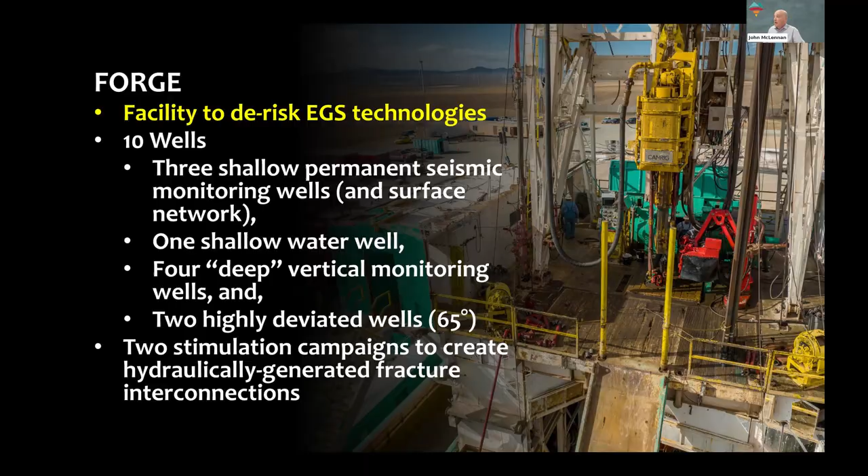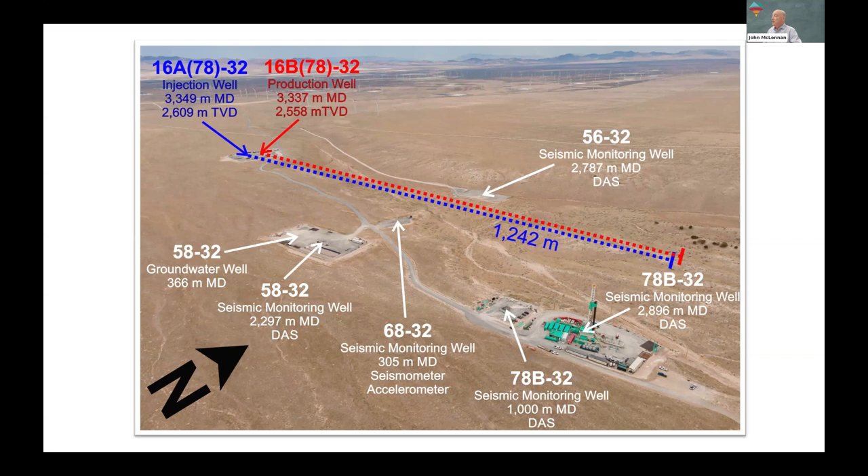To get a perspective of this, the white arrows indicate the groundwater and monitoring wells, and the blue line indicates an injection well that was drilled at 65 degrees in the direction of the minimum principal stress, fracked in 10 stages over a couple of years. Above that, 300 feet immediately above, is the well whose horizontal projection to the surface is shown with the red dots. That well, known as 16B, is the production well, and it has also been fractured.

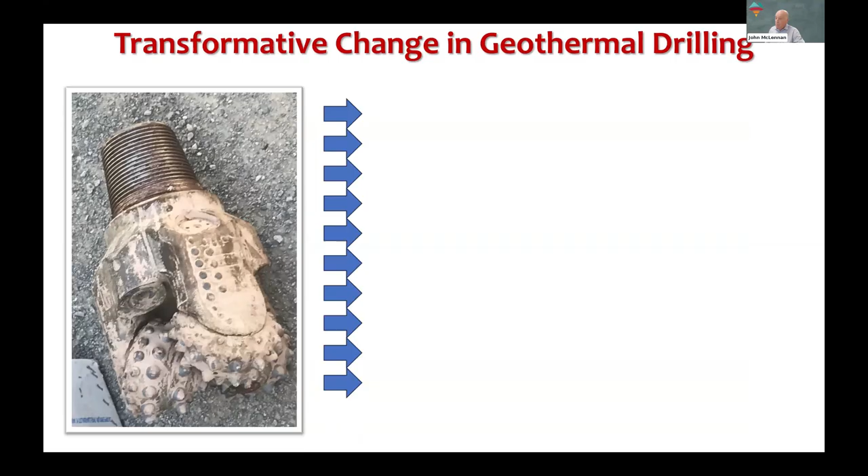Looking back at some of the highlights of Forge, one thing that has turned out particularly well is being a participant in a transformative change in geothermal drilling, moving from roller cone bits, shown here, to polycrystalline diamond compact bits, where we've had tremendous success. That's illustrated in this particular drawing.

The y-axis is the measured depth, the x-axis is the on-bottom hours, that's how much time you're actually drilling. You can see that the first well we drilled was 58-32, drilled with roller cone bits. To go to 7,500 feet with roller cone bits, we were proceeding at maybe 5 to 10 feet per hour, and it took almost 600 hours to get to 7,500 feet.

When we drilled our first inclined well, we drilled that well exclusively with polycrystalline diamond compact bits, PDC bits, and to drill to a greater depth took about half the time. Progressively this has improved with time, as you can see for the wells, and ultimately the 16B is our production well.

Now, I have to say that Fervo, as you'll hear, has taken this even further, where they've really refined the drilling process. This makes a huge difference in the CapEx of geothermal operations.

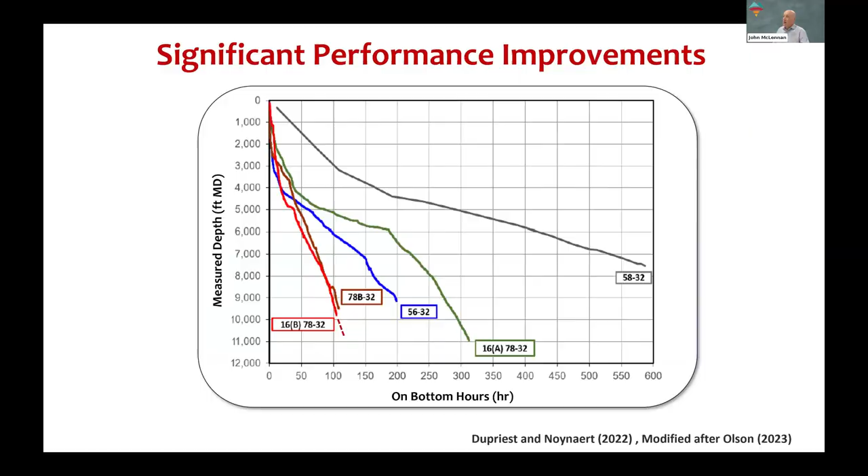So to recap drilling, I think Forge has demonstrated the viability of PDC bits. One of the things that was successful at Forge, in addition to that, was the interactive near real-time bit redesign facilitated by a superb degree of cooperation with bit manufacturers. Certainly in the first well that was with NOV, ReedHycalog. We've subsequently had very good relationships in our drilling with the other drilling bit companies.

So what we've seen is dramatic increases in ROP, and also substantial increases in time on bottom are recorded. As I said, you'll hear more about this, I'm sure, from subsequent speakers.

We've also embodied the philosophy that Forge is a facility for testing third-party products, and we've tried out rotary steerable technologies, we've tried out particle drilling, and we were lucky enough to try out Eavor's insulated drill pipe, which was very successful. However, these are some of the successes.

There are some things that we need to think about, particularly as we move away from sort of an almost ideal drilling environment at Forge. In many other parts of the world, geothermal drillers encounter significant interfacial severity, and there tends to be a correlation between bit DBR, complete bit failure, with interfacial severity, which is usually associated with natural fractures where there's a substantial contrast in mechanical properties going into the fracture and out of the fracture and subsequent bit failures.

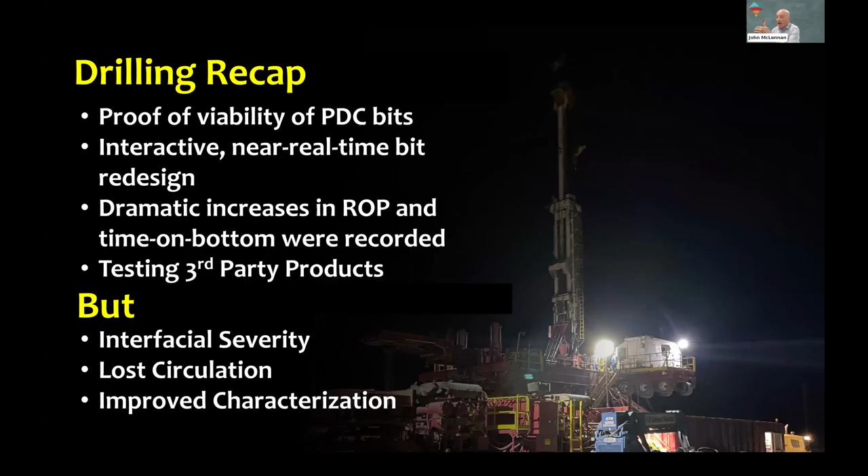Lost circulation in places outside of Forge remains a significant problem in EGS if you're drilling ahead. These two also interrelate to the ability to have improved characterization in advance of your drilling and understanding how that affects your drilling operations. So drilling has some lessons learned and some lessons to be learned.

The stages in the production well were guided by frac hits that were monitored by fiber optics that had been successfully cemented in the production well.

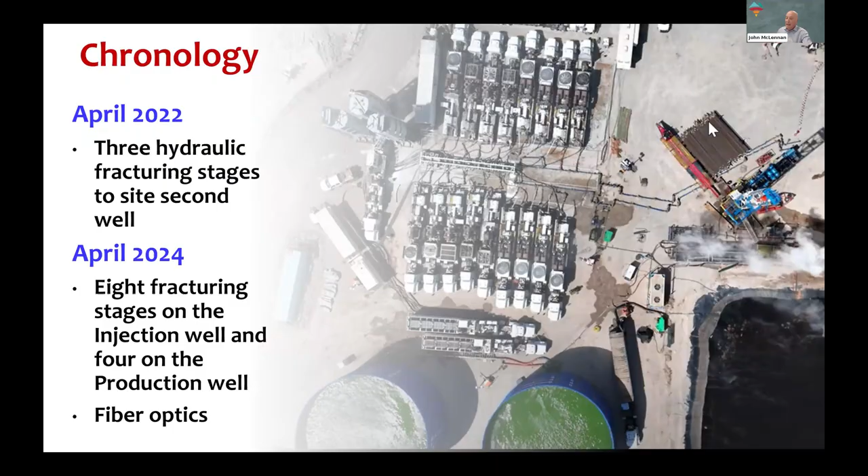So if we want to recap the hydraulic stimulation, here are some of the things we found. First of all, it was a demonstration of successful hydraulic fracturing in a granitic setting. You can see some microseismicity from our first fracking campaign where three stimulations were done at the toe of the injection well.

In my mind, we have a clear demonstration of the requirement for proppant in these fractures. Production logging testing after the fact has shown that fracture stages that were not propped did not take fluid. And so this really reinforces the need for proppant.

However, what are the buts here? Well, first of all, there's still a lot to be learned about the mechanics of completion. How many clusters are important? What sort of cluster spacing? How can we keep fractures independent and maximize the growth?

The second thing, the obvious one, is proppant durability. In these environments, certainly silica sand ultimately is probably not going to work out, and using alternative proppants is going to increase the initial costs, but it'll be of value in the long run.

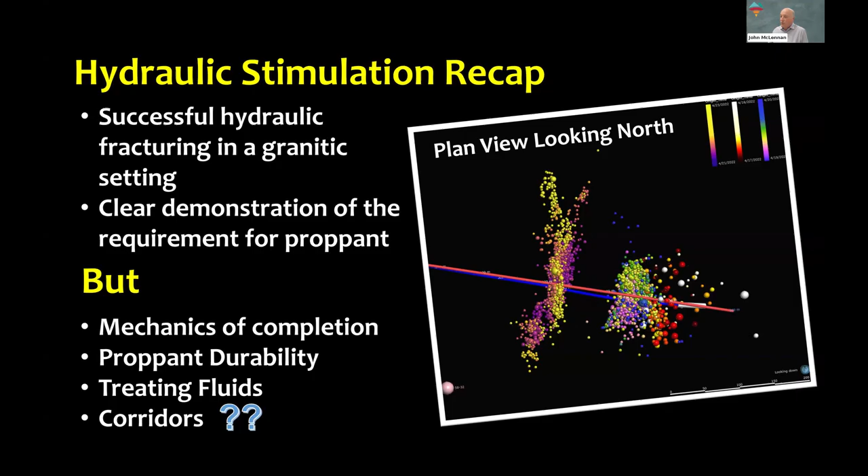And then finally, one of the things that was really very interesting was that there were fracturing corridors. So what do I mean by fracturing corridors? Well, let's look at this plot. Let's look at the east-west extent of the two wells on the x-axis and the vertical depth on the y-axis.

The bottom red line represents the injection well. The top blue line represents the production well. Each one of those dots is either a set of clusters or an individual frac stage. And what you can see from these frac stages, particularly looking at stage 8, is that these stages are not uniform, they're not regular, and that there are interactions of flow.

If I look to the right, I can see that the first 3 frac stages all converged on the same set of frac hits, determined by fiber optics on the production well. So that's one corridor. Then if I look at stages 8, 9, and 10 to the left, uphole, we can see that the end of stage 8, stage 9, and stage 10 all flow out of the same exit.

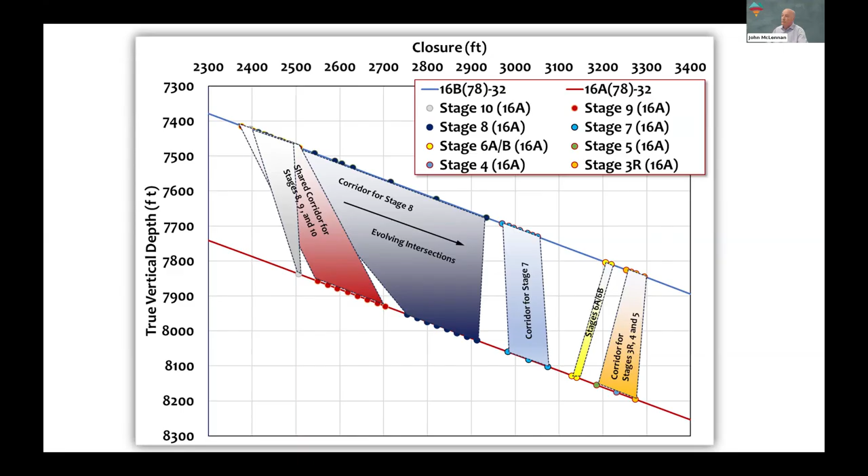So really, there's heterogeneity, there's natural fractures, possibly some minor faults that are playing a role and need to be considered. And so once again, this goes back to the whole concept of reservoir characterization. So how do you test all of this out?

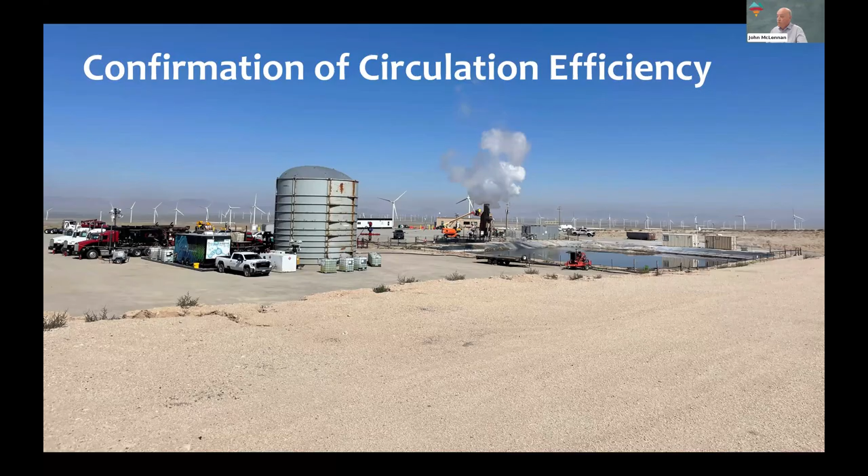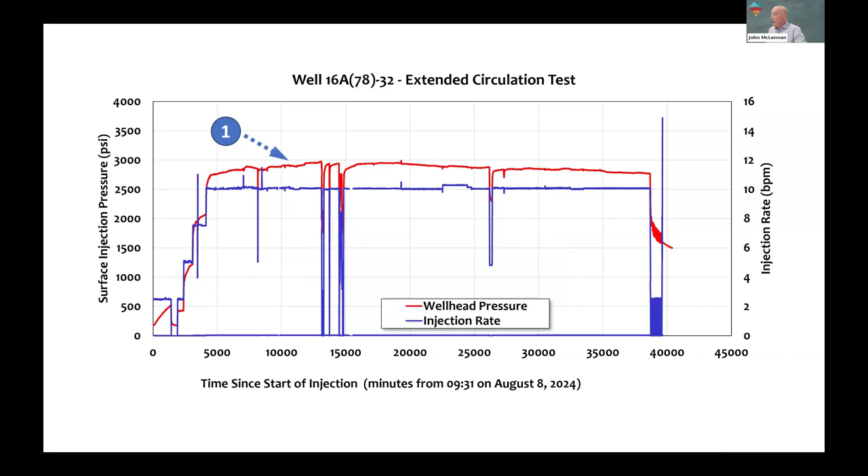We've carried out some short-term and intermediate-term circulation tests, pumping down the injection well, producing through the fracture system, and producing out of the production well. Here is an example from a 28-day circulation test, where the red curve is the surface injection pressure, and the blue curve shows that we maintained a constant rate of 10 barrels per minute over a relatively large period of time. I've got some numbers on here, and I want you to remember what those numbers are pointing to. That number is pointing to a pressure that's about 2,900, almost 3,000 PSI to circulate 10 barrels a minute.

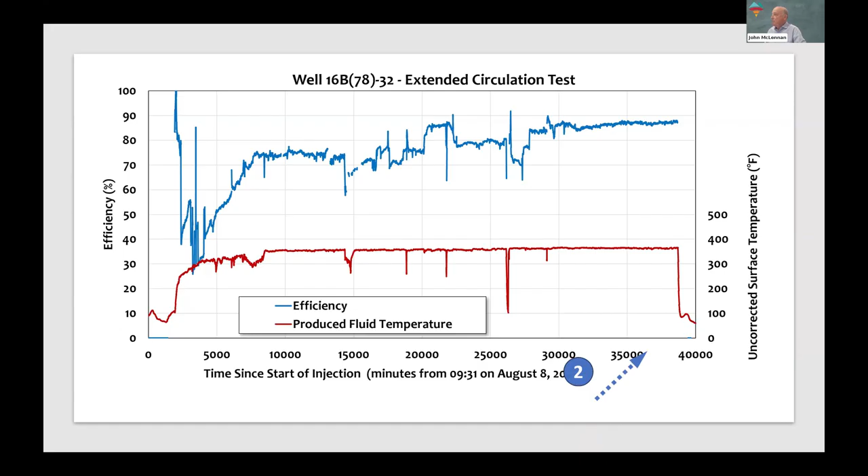And then the efficiency is shown in blue, and that's the ratio of the mass flow rate out divided by the mass flow rate in. And it was approaching 90%. So let's remember that too when we come back for a recap.

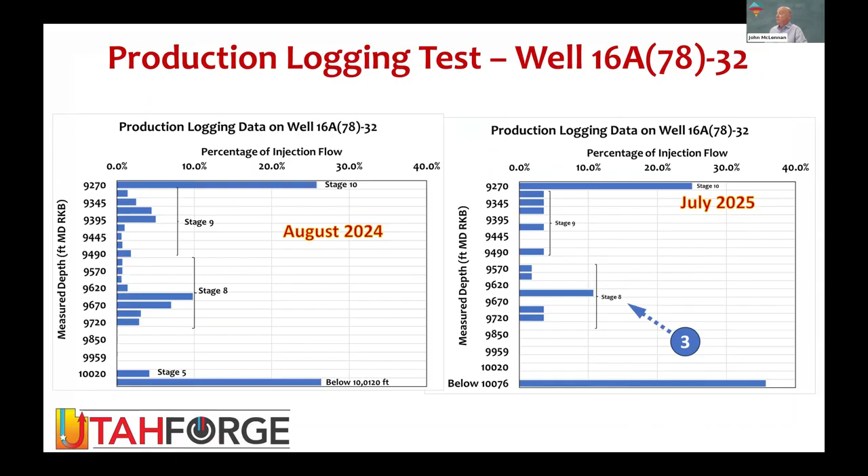We have run production logging tests at various times, and we have seen that there's some degree of uniformity, but not all clusters are taking fluid. And so there's still room for optimizing the clusters in the fracturing treatment. That's the third thing to remember as we come up to this slide here.

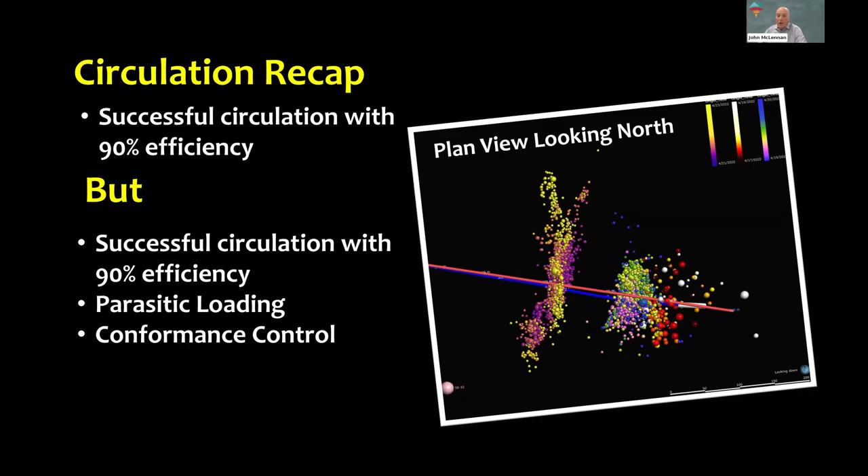90% seems pretty good. However, if you think about where that 10% of fluid is going—and I'm circulating up to 60,000 barrels a day in a production injection well combination—that's a substantial amount of fluid lost. It's anticipated this will decrease over time as you build a network of wells, but replacing that water will be expensive and could have other consequences. That was my number 2 point: 90% efficiency isn't good enough.

The next thing is parasitic loading. We treated these wells at about 2,900 PSI. If one calculates the hydraulic energy required to pump 10 barrels a minute at 3,000 PSI, it's not insignificant, and that parasitic loading subtracts from your net power. This is certainly a solvable problem—it relates to either near wellbore restrictions or inadequate conductivity of the fractures—and it's something that needs to be resolved in the future.

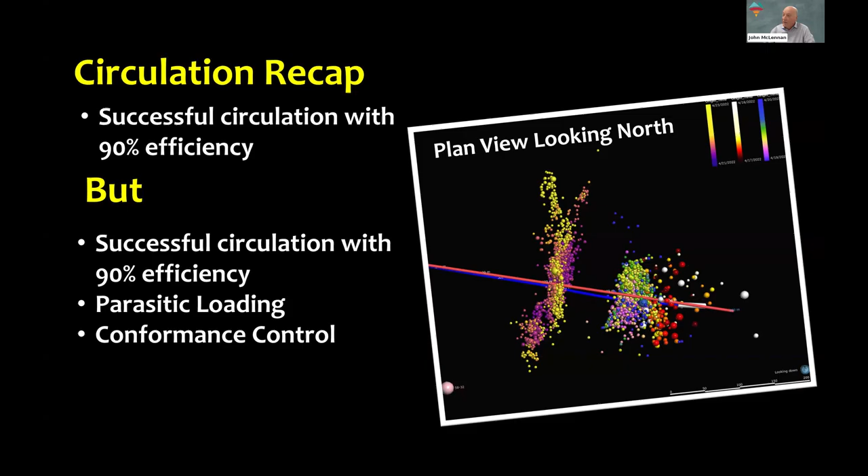The third point is conformance control, where you're looking to get equality of flow through all of your perforations. This is something the industry will have to work on, to understand how to achieve conformance and how to mitigate issues if you don't have it.

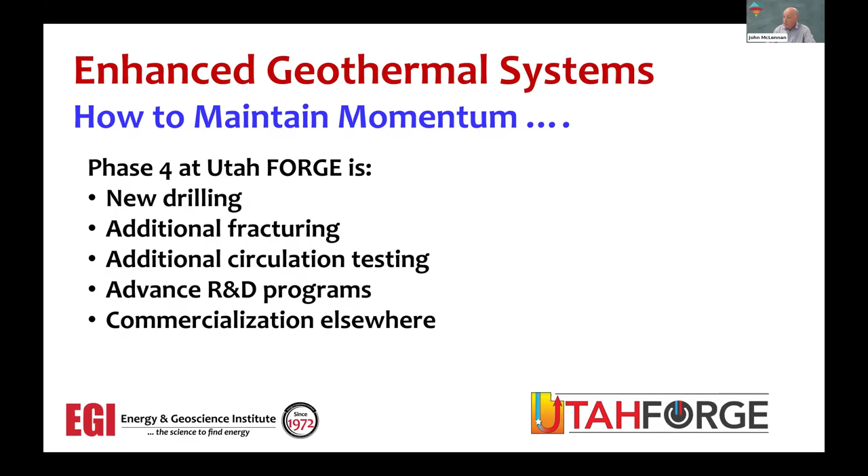So finally, to summarize, Forge has been an outstanding success in learning about drilling, stimulation, and EGS in general, and it offers a very positive reflection on the future. We will continue in Phase 4 at Utah Forge with drilling one additional well, additional fracturing, and additional circulation. Forge funds R&D programs, and we'll do our best to support commercialization done elsewhere.

With that, I think I've used most of my time, and I would like to thank the Department of Energy for funding this particular project.

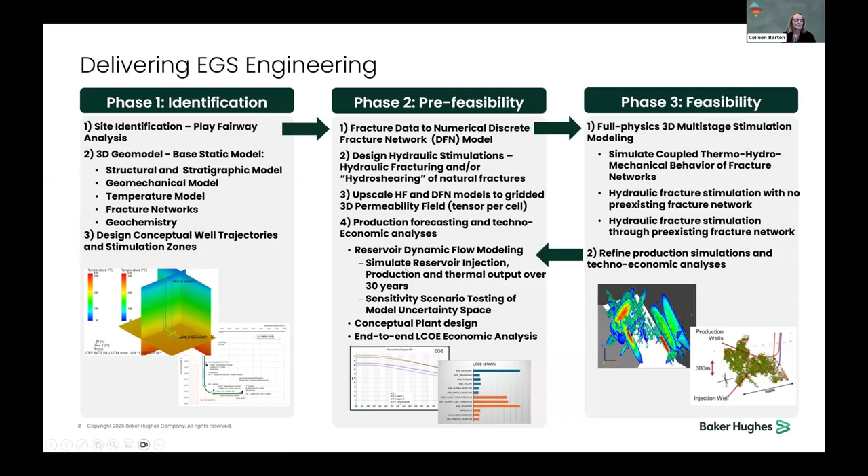So let's take a look. I'll take you through a study we did for a set of clients here in South Texas. We had a robust PFA and down-selected 2 sites: one in south Texas here in the Eagle Ford, and one up in the Haynesville.

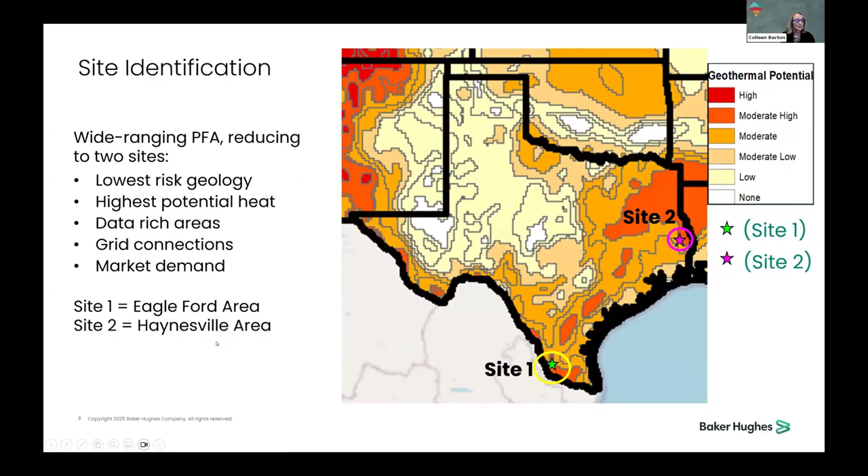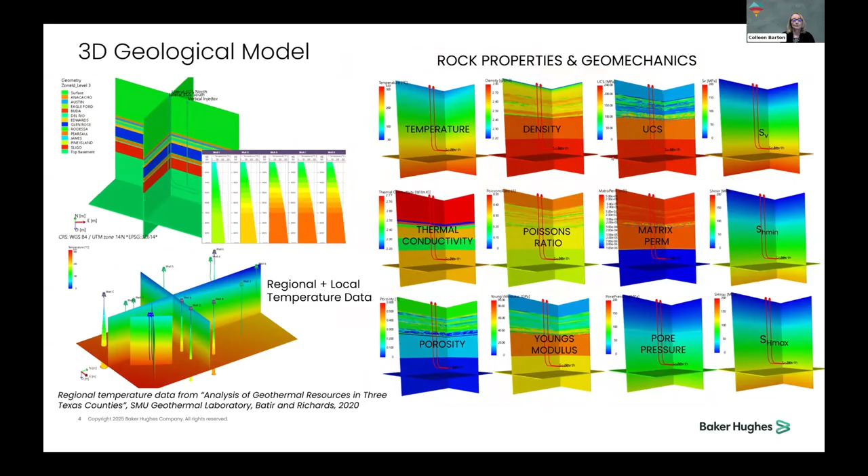So this is an example of the geomodel build. We obviously need a thermal model, so we use some regional data and data from the client that they can provide. But we also need, for the fracture propagation modeling, rock properties and full geomechanics in 3D, all of these parameters.

So in phase 2, as I said, we have the DFN model with connected natural fractures, and then we have a hydrofrac model. These are the explicit fractures with no DFN, 150 meter half lengths, with variable hydraulic aperture.

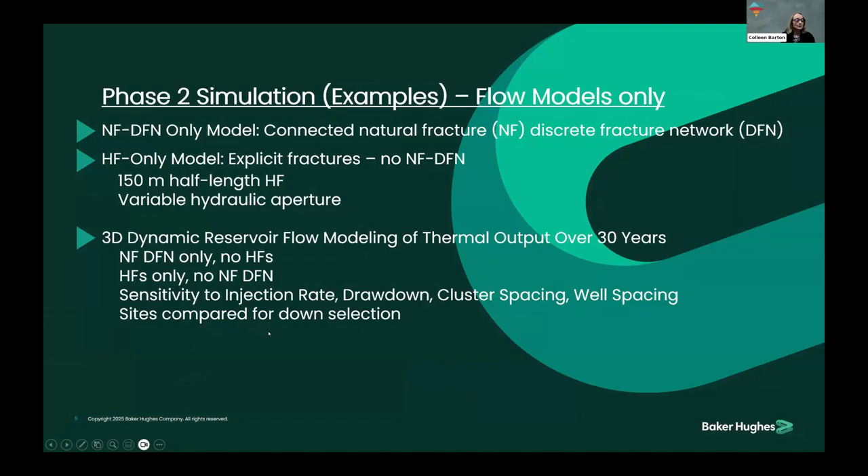And then we put that through the reservoir modeling, flow modeling, to look at the thermal output over 30 years. For these 2 cases, with and without natural fractures, we look at the sensitivity to injection rate, drawdown, cluster spacing, well spacing, and then we compare the sites for further down selection.

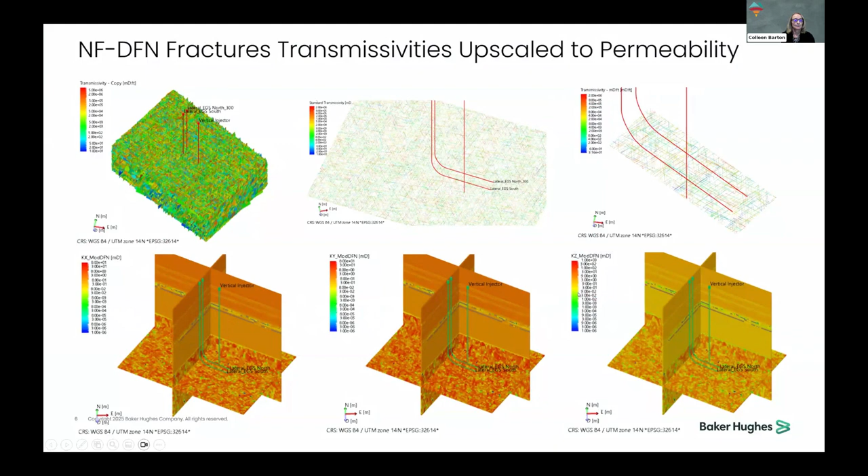And these are the results of the phase 2 dynamic simulation, dynamic flow modeling. For these particular cases, we have 2 lateral wells, 300 meters apart. This is the permeability field. The top row is just the natural fractures only.

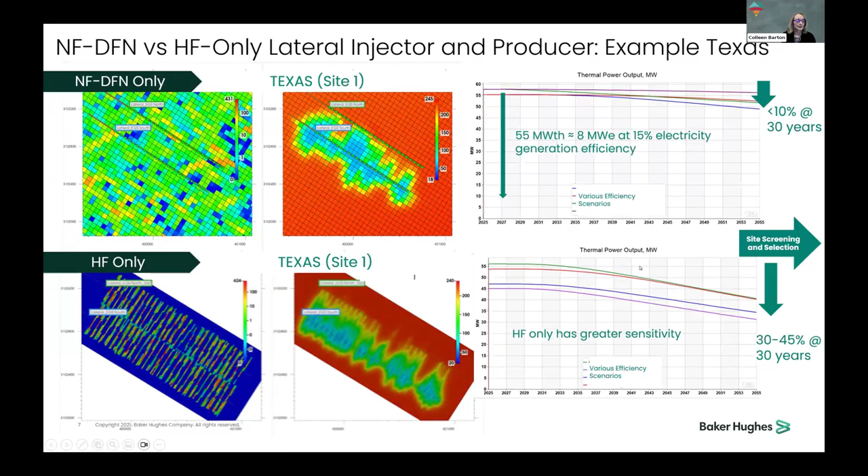So this is another step in the down selecting for the site screening. And then we go into the final phase, where we do the full physics modeling of the hydraulic stimulations with or without pre-existing natural fractures.

For this, that's 60-meter long stages. We use slick water, a little over an hour injection time, 13 stages totaling 800 meters. And we do the dynamic reservoir flow modeling once again using these numerical models, looking at the thermal output over 30 years, using propagating hydrofracs with and without natural fractures to make a comparison.

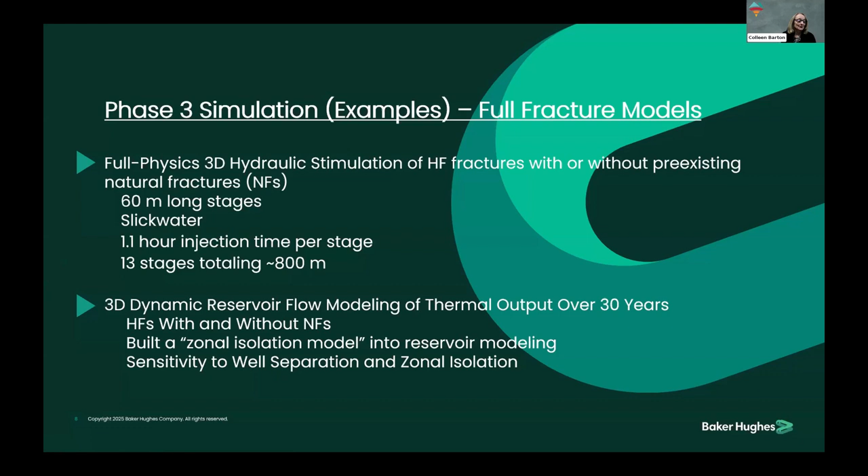We also built a zonal isolation model into the reservoir modeling. I want to say right here that I didn't see John's slides first, so this is right to his point, because we wanted to look at the sensitivity to well separation and to zonal isolation.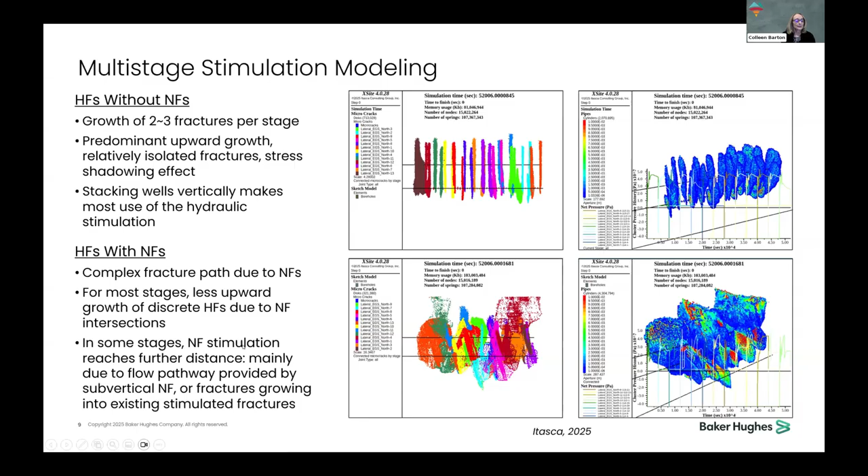So hydrofracts with natural fractures, a much more complex path due to the natural fractures. For most stages, there's less upward growth of the discrete hydrofracts due to the natural fracture intersections. And in some stages, natural fracture stimulation reaches a further distance because of these subvertical natural fractures growing into the existing stimulated fractures.

So why zonal isolation? It was really clear from the get-go. This is one of the early plots that we had from this phase, looking at the water rate along the lateral well, and you can see that specific perfs are taking most of the fluid.

So operationally, we need to implement flow conformance. In the model, it was pretty straightforward. We could shut in the perfs where the flow rate exceeds a certain amount so that we can equalize the flow along the wellbore. This kind of flow conformance should be able to be handled by inflow control devices, ICDs, in the completion.

And what's interesting is that this is a paper by Tom Doe and colleagues in 2014, using an analytical solution by Gringarten, finding very similar kinds of declines from analyses ranging from uniform spacing and uniform aperture to variable spacing, to log normal, to very variable aperture. And again, they ran it for like 100 years, but it was about the same, 20% decline over 30 years.

So what you're seeing here is that less distributed flow, lower residence time, gives higher thermal decline, less heat production, and earlier thermal breakthrough.

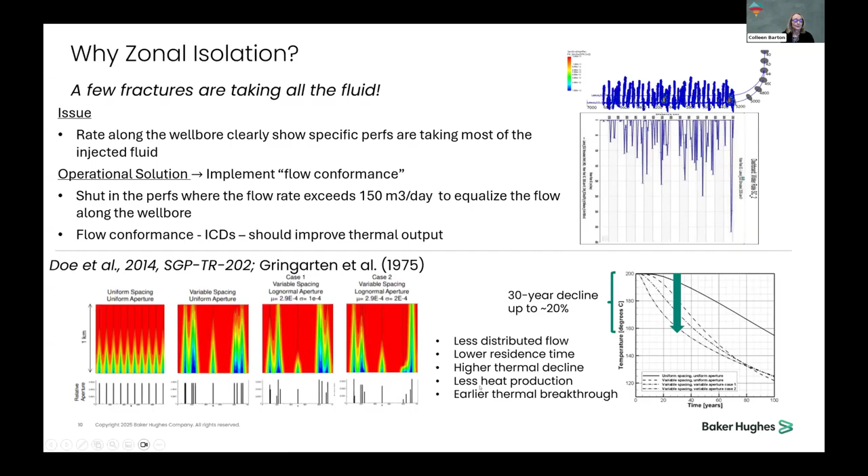So here are the key results from the phase 3 modeling. This is now looking at simulation with increasing well separation.

This is hydraulic fracture propagation into a natural fractured reservoir with and without zonal isolation. The different separation here is the distance of the producer above the injector.

For each of these, 250 meters above was the best. You can see that in about 10 years, you had 8% decline, and in about 30 years, 25% decline. But with zonal isolation, it didn't make much difference—about 7% and the same decline over 30 years.

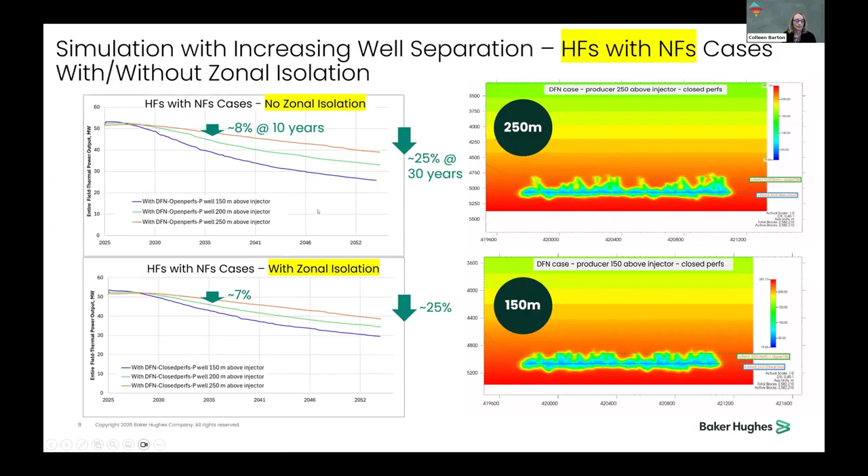These plots you'll see here are temperature, and in this particular case it's 150 meter separation of the well versus 250 meter separation. You can see that the breakthrough isn't as rapid when you have that particular separation, which is good. So this is the simulation with increasing well separation.

This again is hydrofracks without natural fractures, with and without zonal isolation. In this case, you have a 20% decline in about 10 years and 55% in about 30 years with no zonal isolation. If you apply zonal isolation, you halve that, and it's like 9% in 10 years.

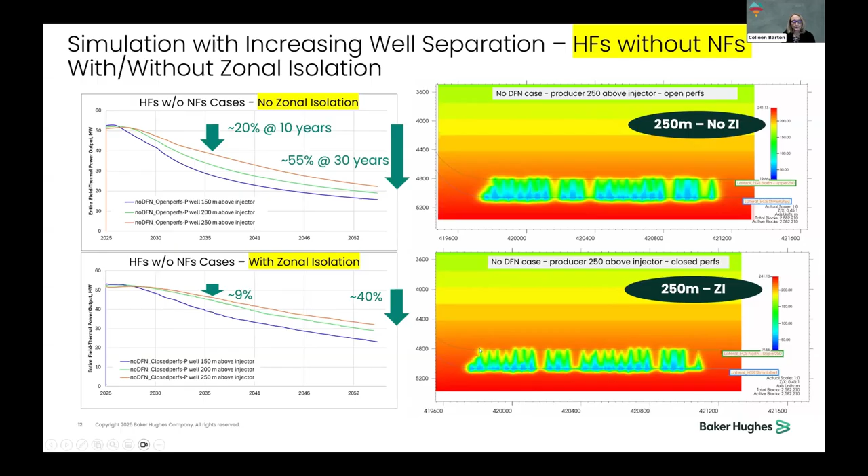And you can see the more uniformity of the perfs and the flow across to the producer.

So another plot here—this is really a summary of what I showed previously. The hydrofracks with natural fractures, there isn't that much difference in decline, but it does make a big difference for the hydrofracks without natural fractures, just the EGS by itself.

This is an interesting plot here. It's a temperature profile across the producer with and without zonal isolation. You can see that the zonal isolation allows the temperature to reach a much higher value than without it.

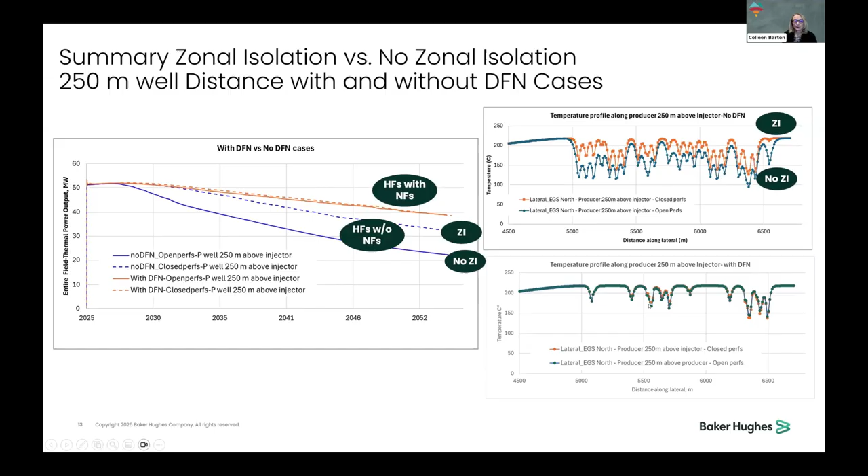And in the case where you have natural fractures, it doesn't make much difference—it reaches a high temperature.

So then the last part that I want to talk about is the economic analyses. We look at the surface plant conceptual design, data requirements for the basis of design, drilling engineering design with risk analysis, all of these costs, the well design, and time and cost estimates.

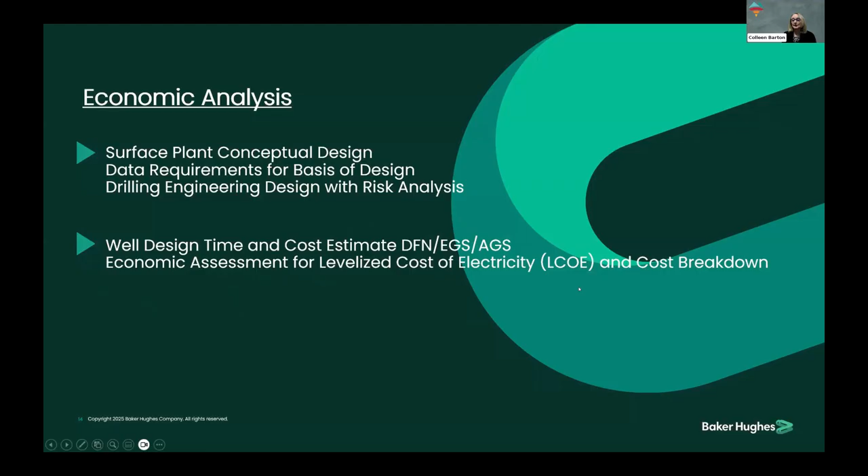We looked at both DFN, EGS, and AGS for these sites to help clients understand what the best use of the site might be, and the economic assessment for a levelized cost of electricity and a cost breakdown.

So for each of these development cases, the concept is of a doublet producer injector, except for this closed loop one well case, of course, and an organic Rankine cycle plant that converts the thermal heat to electricity.

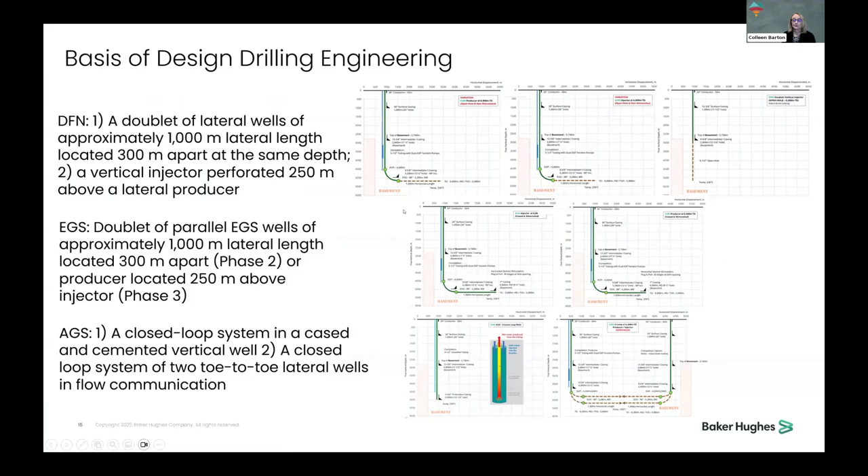This is a comparison of the relative LCOEs for phase 2 and phase 3, so you can understand how we were doing the down selecting. Very clearly here, AGS is far more costly than either EGS or just having natural fractures themselves, and that's the reason for the down selecting.

Into phase 3, what you're seeing here is this trend of more cost if you do not have zonal isolation, and then this is the trend with getting that sort of Goldilocks well separation that you need to have.

Then the assessments, the economic assessments, are based on the various economic and commercial assumptions for each well type: E&A de-risking costs, upfront costs over 2 years, power plant and other capex, operation and maintenance cost over 25 years. Every detail—labor costs, water operation and maintenance, pumping.

But note really that repurposing, for the AGS case for example, repurposing existing oil and gas wells significantly reduces the capex. So this cost split here is interesting—you can see that, as John mentioned, the well costs are the biggest cost.

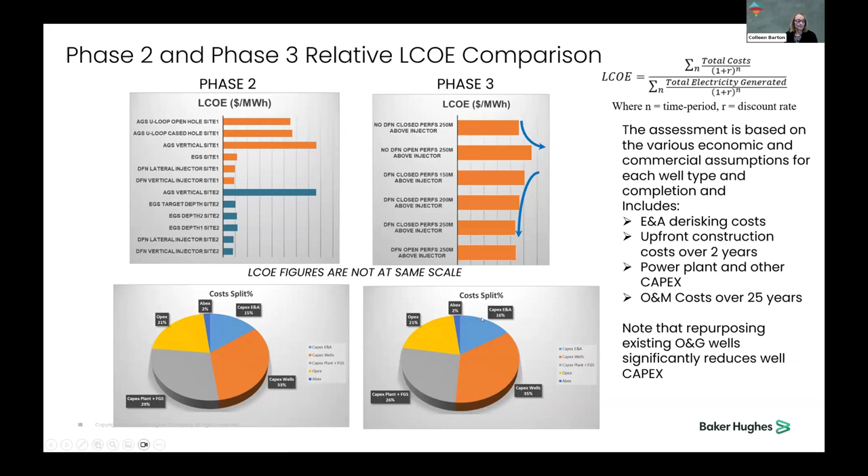All right, so just in summary, I guess all I wanted to say is that we've shown the potential for EGS locating sites in South Texas by drilling to about 5 kilometers, and that the relative LCOE is highly dependent on the subsurface conditions and really the starting conditions.

In other words, whether you have pre-existing well data or not, production wells must be positioned above the stimulated injector to exploit vertical growth of hydraulic fractures into regions of lower stress.

That's very clear. Pre-existing natural fracture networks seem to enhance thermal output. Well separation has a significant impact on thermal output with respect to hydrofrac length, and zonal isolation flow conformance significantly improves the thermal output for the hydrofrac cases only. In fact, we would say it's a requirement.

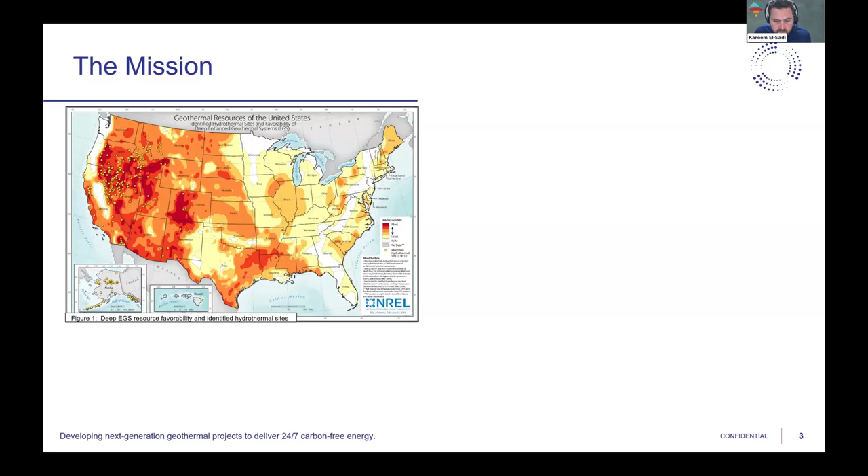We're, in a sense, in a pure pursuit of temperature. We're targeting hot, dry rock through the installation of horizontal wellbores, connecting them via hydraulic stimulation, as opposed to targeting geologically constrained natural fractures in formations that are highly localized. With this, we're able to transform the energy landscape.

And then when you superimpose a commercial reality on top of the technical opportunity, what we find is that today there's enough geothermal energy within a subsurface depth of 5 kilometers to fully satisfy US electrical demand. And if we were to go deeper, to a depth of 7 kilometers, there's an electricity generating potential that can meet the US electric demand 5 times over. So quite a bit of opportunity.

And that brings us to our mission. We know that there's a tremendous amount of potential to access clean, reliable, cost-effective, scalable geothermal energy. So our mission is thus to leverage innovation in geoscience to accelerate the clean energy transition by providing cost-effective, reliable geothermal energy.

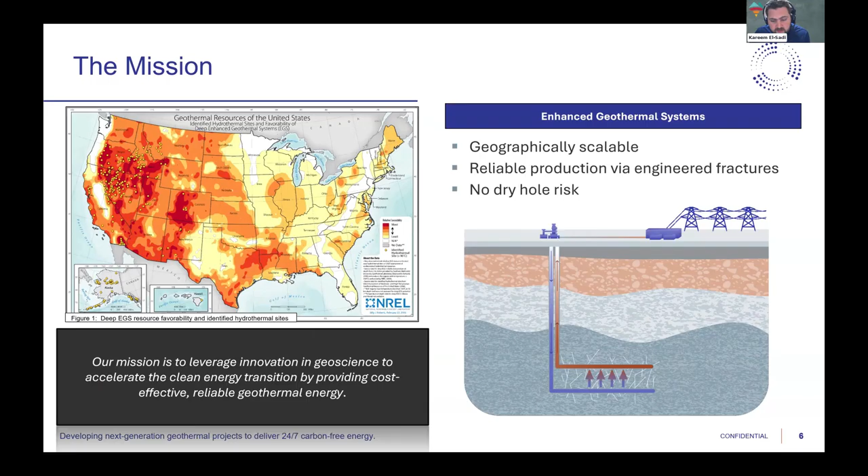Okay, so that's the mission. And remember, we're here to talk about how we've modernized geothermal field operations at Fervo. So why would I want to start talking about traditional geothermal resources first? Aside from the commercial and energy potential limitations of traditional geothermal resources, there's a key attribute of those traditional geothermal fields that is, I think, sometimes underappreciated when we think about economic execution and large-scale commercial development.

We established previously that they're geologically constrained. We know that with the geologic constraints, finding a viable geothermal resource is often an exercise that's steeped in some uncertainty and takes iterative trial. And when we combine somewhat limited deployment opportunities and higher subsurface uncertainty with variable power generation potential, what we end up with is, in some cases, a lot of start-stop operations.

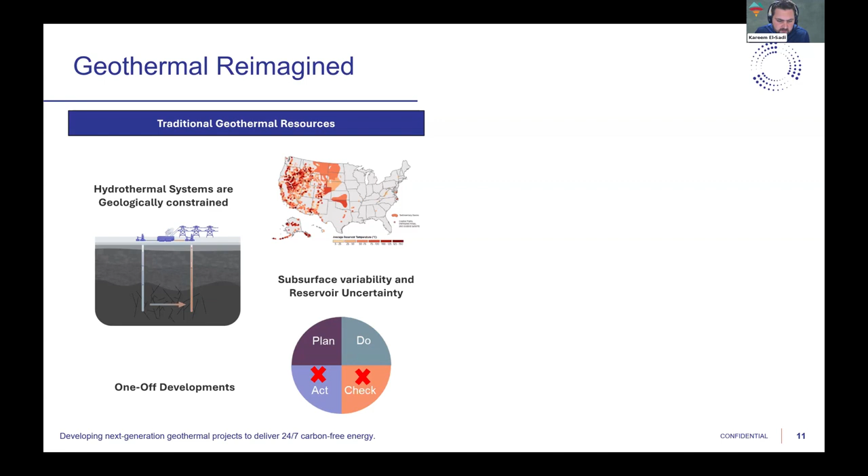And so if we think of the plan, do, check, act cycle of optimization, where our goal is to learn from a large repetition count, we find that with traditional geothermal resources, there just isn't enough of a flywheel potential to make it all the way around the circle. And you have fewer opportunities for iterative improvement and systematic cost reduction, because the inherent intermittency is disruptive and antithetical to continuous improvement.

With the EGS opportunity, by contrast, you've got a subsurface target selection, which is largely driven by temperature, which is both abundant and very well understood. The reservoir performance is predictable and scalable because, in effect, it's the product of an engineered design as opposed to naturally occurring variability. So we're in control of the reservoir design.

When we combine the unconstrained nature of the opportunity with the predictable nature of power generation, what you find is now you have the right conditions for continuous operations in the field to develop these resources at scale. And so then iterative improvement, the flywheel starts to spin to our heart's content.

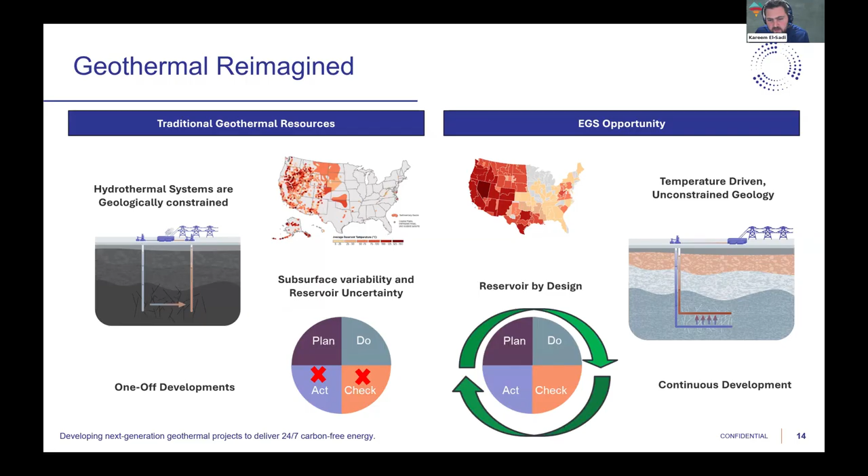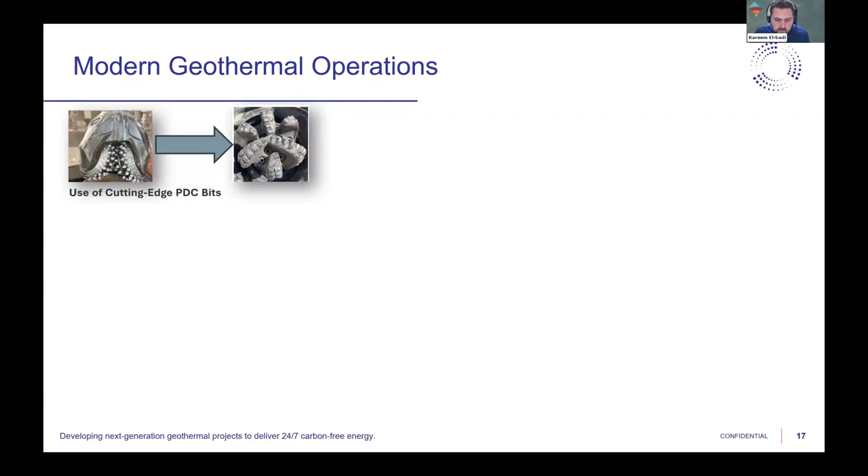So we can look at some examples of this learning flywheel in practice from Project Cape. With continuous operations, we're well positioned to rapidly iterate on bit designs and learnings. We've graduated from the age of roller cone bits for hard rock. We've enabled the use of PDC bits to unlock these basement formations, and now as we drill more, we understand the significance of cutter development, and how that plays a key role in allowing us to unlock drill rates that were deemed not attainable for many decades.

With continuous operations, we're able to invest in modernizing the rig fleet using the latest in rig technology and automation. We electrify the rig for environmental efficiencies, and we're able to deliver greater amounts of horsepower to the drilling operation. Again, because of the rep count, we're able to take a systematic, controlled, scientific approach to wellbore optimization, trialing things in a disciplined manner with a clear goal of drawing conclusive results, only because we've got the benefit of repeat and continuous operations to build on those learnings.

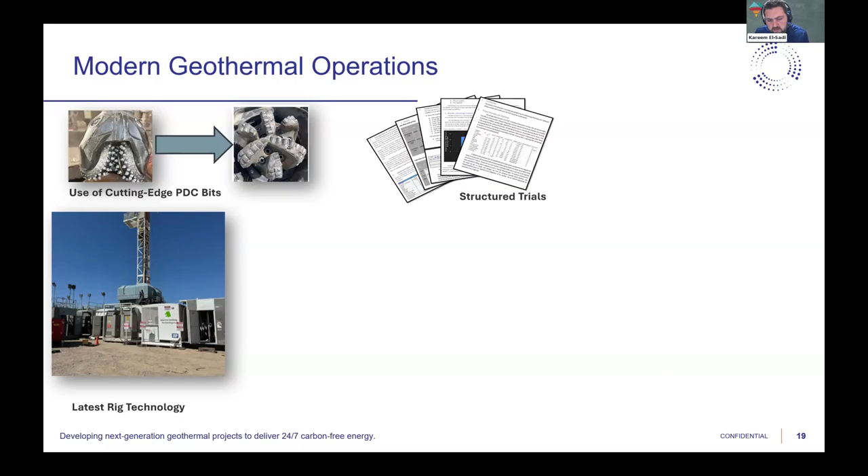We lean very heavily into surface and downhole data acquisition to develop these highly sophisticated models of the thermal and mechanical interactions in the subsurface, and that allows us to better plan our well and power plant designs. But we're also able to validate the performance and benchmark our results periodically to marry that immense computing and modeling potential with grounded empirical data. And so we're able to elevate the quality and pace at which we can drive improvement.

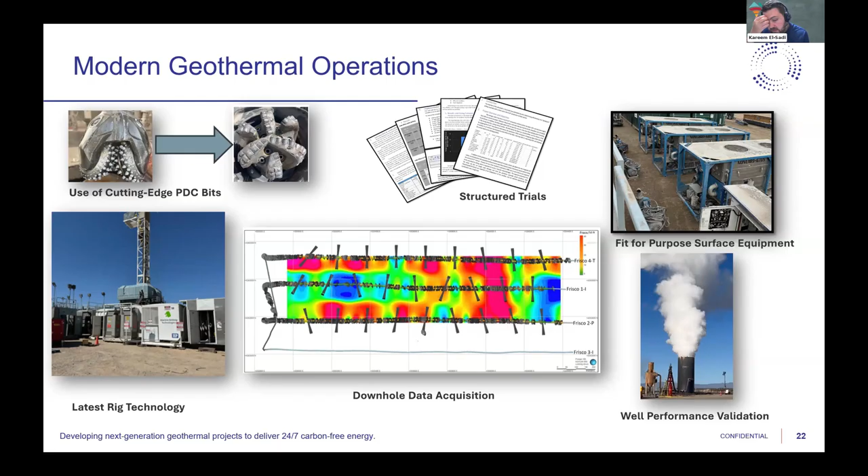We can invest in fit-for-purpose equipment, which allows us to go deeper and hotter and still maintain a safe environment and drive consistent, repeatable execution. So when you think of the flywheel in action, the attributes of a modern geothermal field operation are predicated on having that ability to make investments that elevate the standard at which we execute, and afford us the opportunity to learn repetition after repetition, unlocking the data gathering potential that takes a conceptual design to a high precision exercise in field development.

While I think it's helpful for us to review that flywheel in action like we did, I did want to take some time and talk about some of the other practical takeaways that I've personally gleaned from these last couple of years being involved in the EGS journey at Fervo. I've noted a few points. These are more reflective, and it's less about what is enabled by continuous operations and more about how we actually go about enabling it in practice.

So number one, there is no substitute for doing. Rapid iteration is what drives the learning curve. So as you could tell, this isn't a lab project. We're not doing this work on a test well somewhere or simulating results on a computer. We've drilled over 20 horizontals and stimulated multiple wells. And so these learnings that we've gathered over time are hard to come by without actually putting steel in the ground and making it happen.

Second, gather data and trust the data. It's one thing to go and do a bunch of things and conduct operations, but if we're aimless in how we approach it, there's the risk that we miss the forest for the trees. In a sense, what happens is we artificially downgrade our ability to learn. So every decision and every action, every operation needs to do one of two things: it needs to either feed the data gathering process or be informed by reliably gathered data. How we actually go about this is probably its own conversation topic and very involved, but it's very critical that we trust the data that we're gathering.

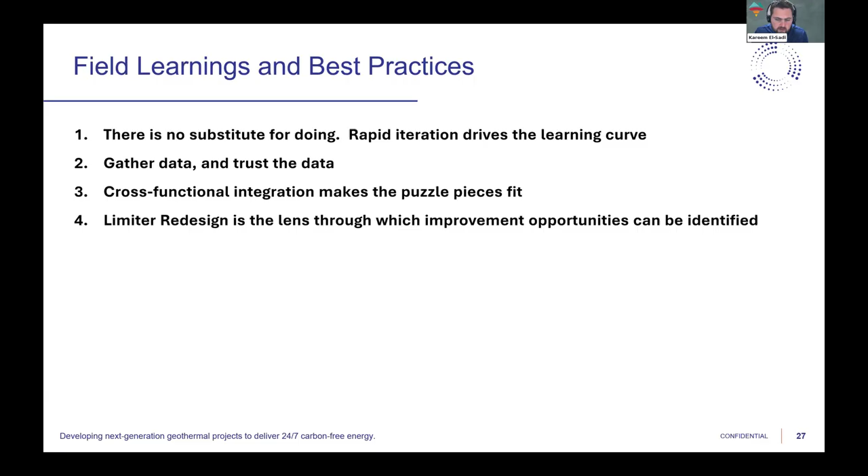Limiter redesign is the lens through which improvement opportunities can be identified. You may have heard the term limiter redesign. I think this was coined by Fred Dupriest several years ago, and it's now embraced really beyond the world of drilling. It's both a technical term, but also I think of it as a cultural term. In a sense, what happens is we expect improvement by virtue of our process. So when we think about performance improvement, the view is that at any given moment in time, there can only be one thing limiting our performance from being elevated to the next level, whatever we're measuring, whether it's rate of penetration, bit run length, total power produced, and so on. There's one limiter, and our goal and focus of attention is to identify that limiter, put our heads together to work it out of the system, and then move on to the next one and continue to repeat that process.

This one is a little bit softer, but 'can't' is a self-imposed limiter. All of the biggest breakthroughs we've seen at Fervo—drilling horizontal wells in hard rock granite, running high temperature fiber in abrasive formations, high build rate control—all of these came from ignoring traditional boundaries. I think the industry is doing this together, slowly identifying these previous 'can'ts' and thinking about what we can do to actually make it happen. The big problem with this word is it really kills the spirit of innovation. It stifles the creativity we need to think about how we can be enablers for problem solving rather than buckling to the pressure of perception. So it's a little bit of a softer one, but I think we can't stress it enough: that word needs to be removed from our geothermal vernacular.

The sixth one: early agility is the key to long-term stability. When we're talking about success at scale, it doesn't mean having perfect plans up front—it means having good plans and flexible ones. We talked about gathering data and trusting the data a few minutes ago. Trusting the data sometimes means our initial hypotheses were proven otherwise, and it's in our best interest to make a pivot. If we dig our heels in the ground and become rigid, the opportunities for improvement and further learning will pass us by, and stagnation becomes a real risk. So one of the things we try to maintain is the ability to pivot once we've received data that tells us that we should.